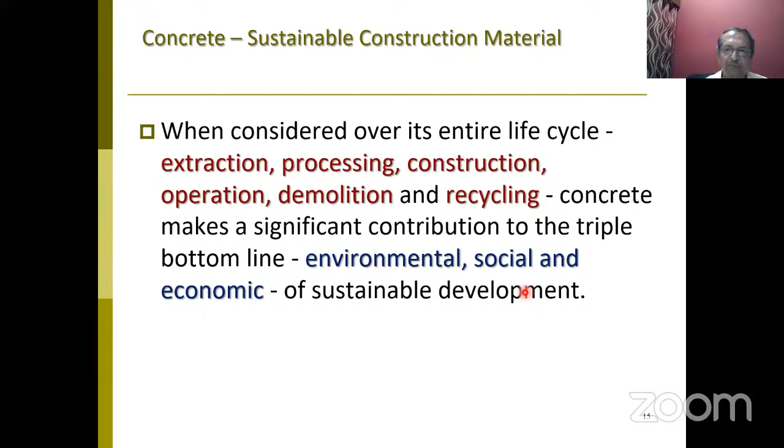So based on that, if you study most of the materials which are available now as alternate to concrete, it appears that we have no choice but to use concrete, and concrete is not such a bad enemy after all, from the bottom line of environmental, social, and economic sustainable development tenets.

Still, we want to make that concrete more sustainable, or as sustainable as possible. And the route that we can take is to make cement more sustainable. That is, use less energy intensive kilns, or use supplementary cementitious materials to reduce the clinker component.

Here I would like to say that this concept of 1 ton of carbon dioxide for 1 ton of cement was in the era of ordinary Portland cement being called as cement. Today, cement has sometimes more than even 50% of alternate materials which is there in the cement, which is called blended cement.

So for example, if you use fly ash, up to 35% of the 1 ton of cement happens to be fly ash, which is not contributing to carbon dioxide emission. Or if you are using slag, GGBS, which will be probably upwards of 50% of the volume of cement. So if you can, this in fact enhances the quality of concrete and contributes to sustainability.

So one is to make cement more sustainable so that we produce more and more blended cement rather than ordinary Portland cement, and keep ordinary Portland cement reserved to only where you require certain high strengths and high performances in structural requirements. Anyway, there are also possibilities that we use new types of clinker.

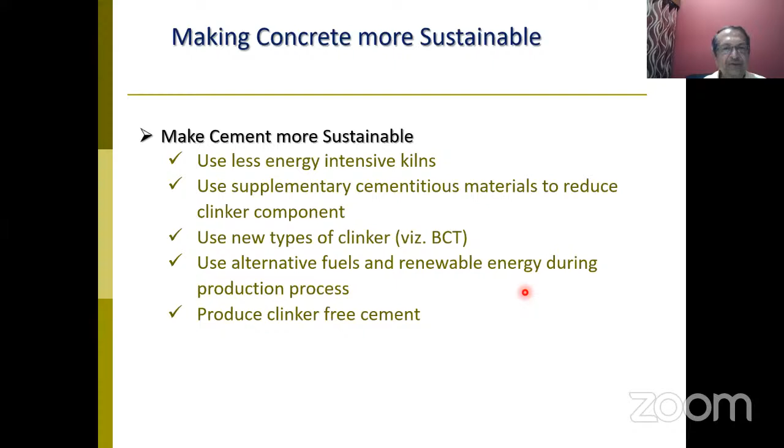So there is also an attempt to see if we can produce clinker-free cement. So clinker is the one which is bringing in the harmful things like emissions and also energy consumption. We are trying to see if you can manage without clinker a cement.

Now coming to concrete, the alternative materials people are looking at in concrete are recycled aggregates, secondary aggregates, and then utilization of wastes in concrete, either as reinforcement or as special additives.

Attempts are also on to make the concrete more durable, because the longer a building or a structure lasts, the lesser will be the consumption of cement or concrete or both, and hence sustainability is said to be achieved through longer lasting structures.

So this is also vigorously being pursued, and then capturing or sequestering carbon dioxide in concrete, or capturing carbon dioxide and storing it underground in bedrocks and so on and so forth. This is another route that people are trying to pursue. And they are also trying to see if we can go for clinker-free concrete like geopolymers, etc.

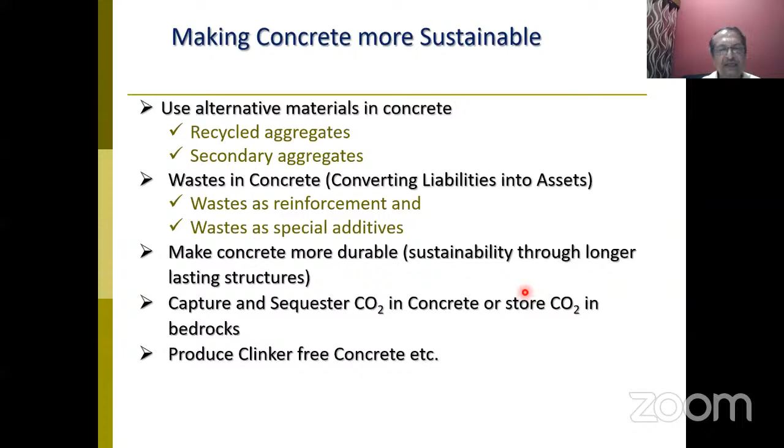So how people are now trying to attempt the reduction of carbon dioxide as mentioned, by 2050 or 2070 or whatever, there are several attempts. A few of them I would like to very quickly go through because the time allocated is only 25 minutes. So I would like to highlight certain things. It's neither exhaustive nor complete in that sense, but whichever is priority according to my limited knowledge, I have tried to cover here.

So now, first thing that I would like to highlight or show is about the Global Cement and Concrete Association's initiative. This is called the GCCA Initiative. This was unveiled on September 1, 2020.

40 of the world's leading cement and concrete companies, including several leading cement companies from India, have signed this pledge, and they have a roadmap that they are now trying to put in place. So the ambition statement of GCCA demonstrates that there is a commitment of the industry across the globe to drive down the carbon dioxide footprint out of this particular material, which is the world's most used man-made product, with an aspiration to deliver the society with carbon neutral concrete by 2050.

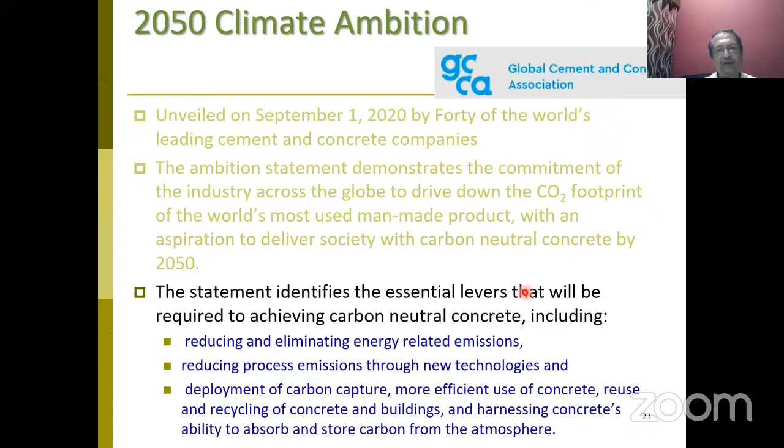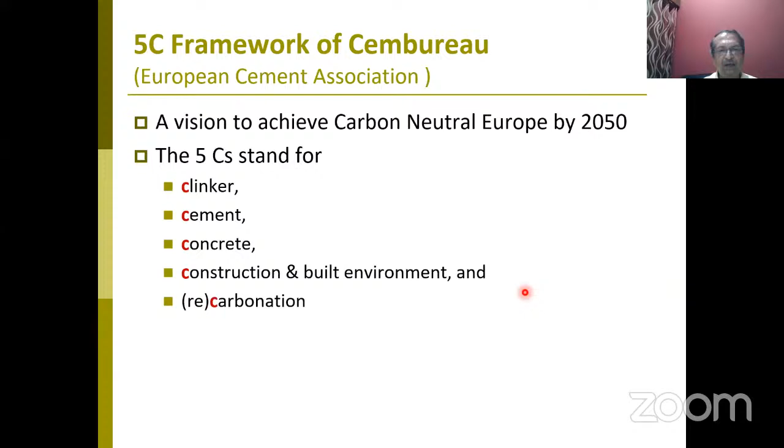So one such initiative which came much before GCCA is called the European Cement Association, or Cembureau's framework. This is called the 5C framework. The 5 C's are C for clinker, C for cement, C for concrete, C for construction, and C for recarbonation. These are the sectors in which people are trying to work, and they are confident.

Of course, this is a very detailed document available on the net if anybody wants to see how they are planning. Cembureau is planning this 5C approach and reducing emissions.

That is, through the cement route, through the concrete route, through the construction carbonation route, through reduction in emission route, and clinker route, and so on.

So carbon capture and utilization is one approach. Carbon capture and storage is another approach. This is what Cembureau has attempted to do, which most of the European countries are following.

Of course, GCCA is a much bigger worldwide body that has now come into the picture from 2020 onwards, and India is also participating through that route.

There are some approaches which I would like to quickly highlight for upcycling the carbon dioxide. Hundreds of companies and research groups are working on this to keep the carbon dioxide out of the atmosphere and store it in some place, including geological formations, soil, soda bubbles, concrete blocks, and so on and so forth.

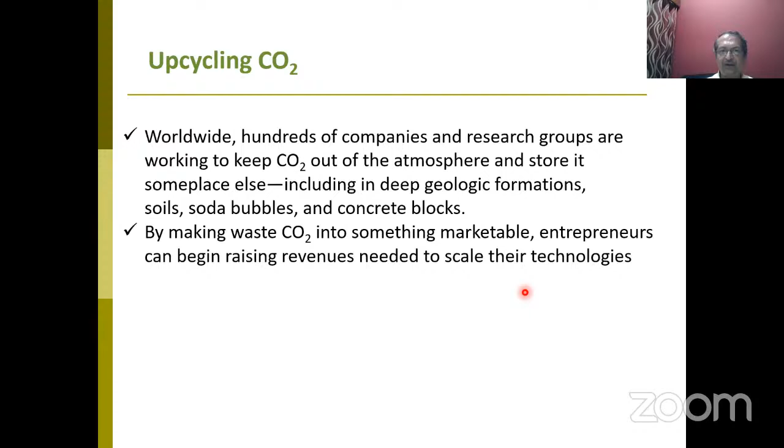They are also trying to make waste carbon dioxide into something which is marketable. So this carbon dioxide, if somebody is going to put into use and it can be marketed, that will be a very nice way to make sure that it doesn't get into the atmosphere. So entrepreneurs can begin raising revenues needed to scale their technologies by making this marketable.

So there is also a possibility that carbon dioxide mineralization is possible by capturing the carbon dioxide from several, not only cement, but other industrial emitters also, purifying them, storing them, and distributing to concrete producers in pressurized tanks.

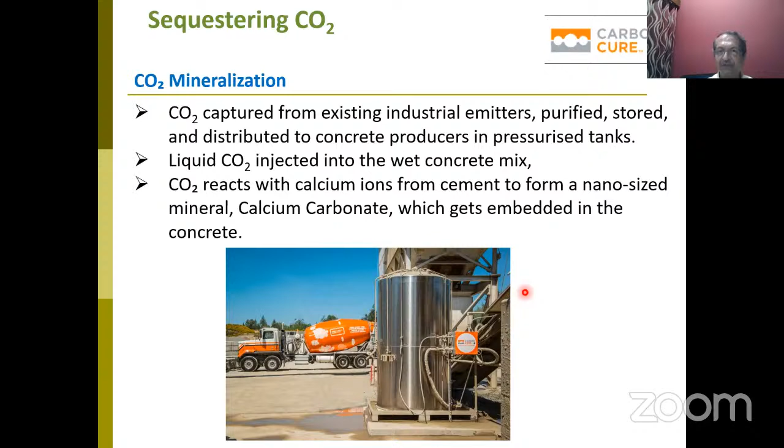This purified liquid carbon dioxide is kept in stainless steel drums at the RMC yards, or ready mix concrete producing manufacturers' place. It is injected into the wet concrete mix using a patented technology, and the carbon dioxide reacts with the calcium ions from cement to form nano-sized mineral calcium carbonate, which gets embedded in the concrete.

So the result is that we get a stronger concrete, we get better mix optimization with a reduction in cement consumption and also consumption of carbon dioxide. To the extent people are expecting that about 500 million tons of carbon dioxide per year can be sequestered or captured and put into good use in concrete.

Just like I mentioned earlier, when we add mineral admixtures to cement, it's not an adulterant as many people think it is. In fact, the introduction of either fly ash or slag improves the performance of the concrete in terms of strength as well as durability, like capillary closure and better performance against acids and so on and so forth, and reduction in the corrosion of steel, etc.

Similarly, by inducting or inducing liquid carbon dioxide into the concrete mix, we not only consume carbon dioxide, but we also improve the quality of concrete.

So this technology can be retrofitted into any existing concrete plants, and many attempts are happening of this approach in India as well. Not only injection of carbon dioxide, there is also a possibility of curing with carbon dioxide. The idea is to get much higher strength and better durability. This is something which has been proved and is now being tried by several RMC plants across the world to improve on this particular system.

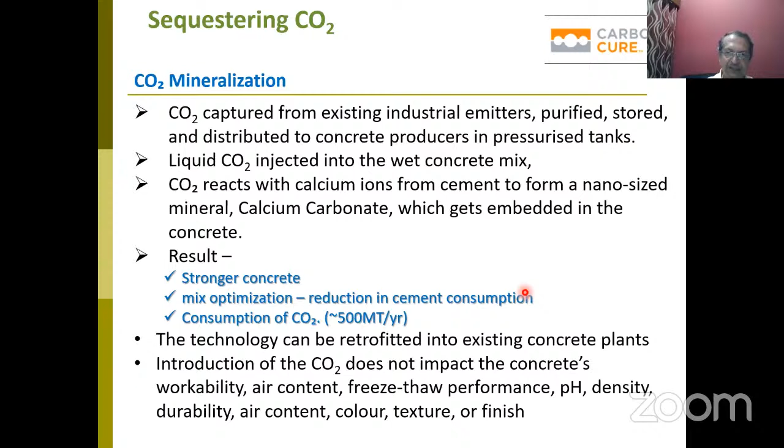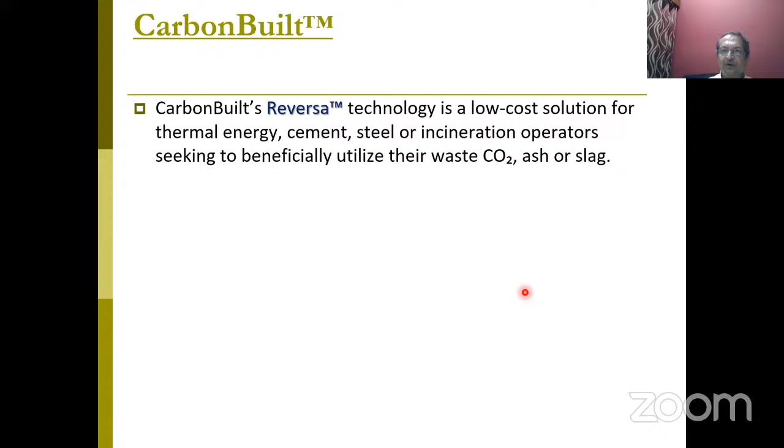There is another approach which the Institute of Carbon Management of UCLA is proposing. This involves locking flue gases of carbon dioxide into limestone within the concrete, a little different approach from the previous one. This is also getting popularized, called the Reversa technology, again patented right now. It's a low-cost solution for thermal energy, cement, and steel or incineration operators.

The Reversa process reduces emissions through a combination of utilization of carbon dioxide by permanently embedding it, and also avoiding, that is reducing, carbon dioxide emissions associated with raw materials. This modular technology can be added to a site to permanently embed the flue gas carbon dioxide into masonry or precast concrete produced nearby. During the curing process, carbon dioxide is directly injected from flue gas streams like power plants or cement factories, without storing it. The concrete manufacturing industry is placed next to these carbon dioxide producing plants, feeding that directly into the concrete mixture where it is chemically transformed and permanently stored.

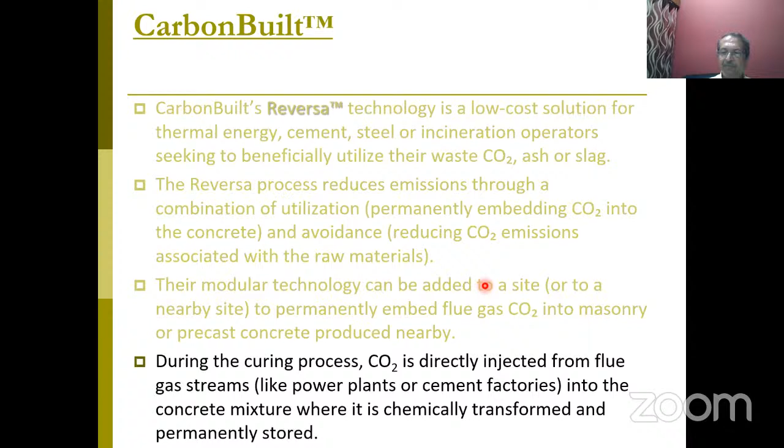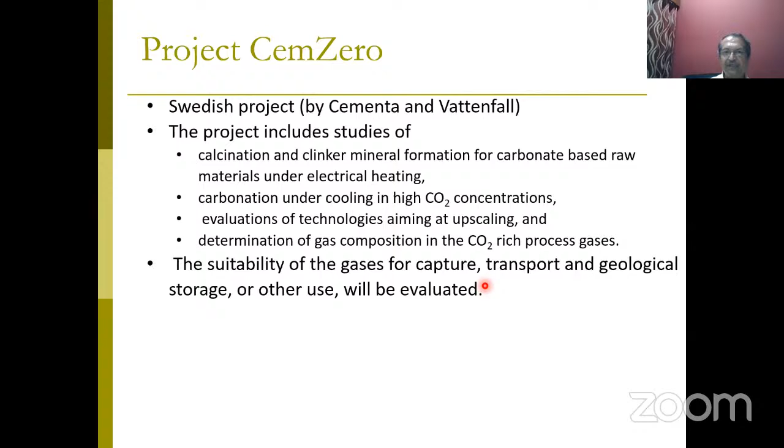There is also another project called Project CemZero, a Swedish project by Cementa and Vattenfall. This project involves studies and prototype experimentation on calcination and clinker mineral formation for carbonate-based raw materials under electrical heating, carbonation under cooling in high carbon dioxide concentrations, and evaluating technologies aiming at upscaling and determination of gas composition. The suitability of gas capture, transport, and geological storage is being evaluated. The three thrust areas that Project CemZero is focusing on are heat transfer with plasma in rotary kilns, direct separation of carbon dioxide from calcination of carbonate-based materials, and carbon dioxide-free products with electrified production.

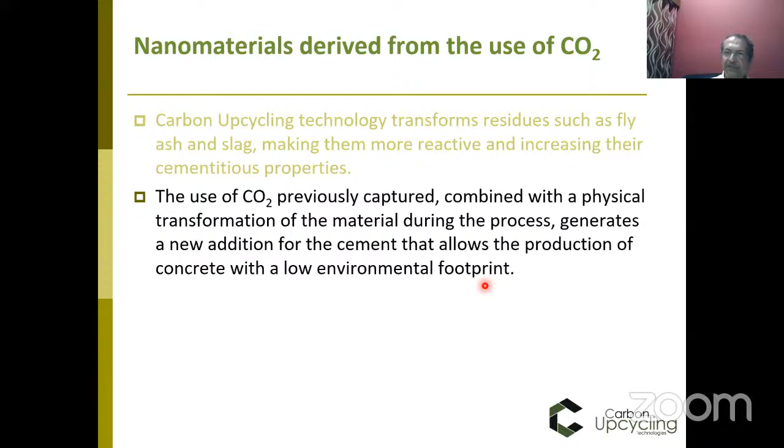And then nanomaterials, everybody is getting into this area. Carbon upcycling technology transforms residues such as fly ash and slag, making them more reactive and increasing their cementitious properties, which means we can incorporate more of these materials into cement, thus reducing the OPC content within the cement itself. The use of carbon dioxide previously captured, combined with physical transformation, can create a new addition to the cement that allows for production of concrete. The improvement is evident for everybody.

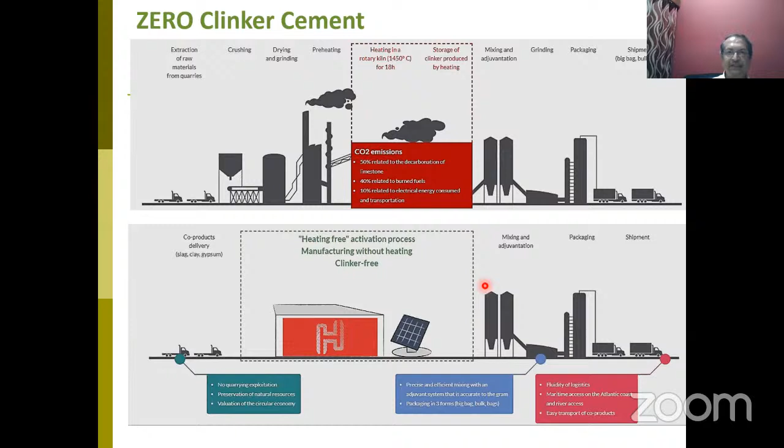There are other approaches which many companies are using. One approach targets the portion which heats the clinker to 1450 degrees centigrade. They are trying to see whether we can do a heating-free activation process using alkalis and things like that, so that we avoid that heating process and also reduce all the attendant carbon dioxide emissions and so on. This manufacturing process by a company called Hoffmann Cements is also trying the approach of valorization and production so that we can use this particular cement for concrete.

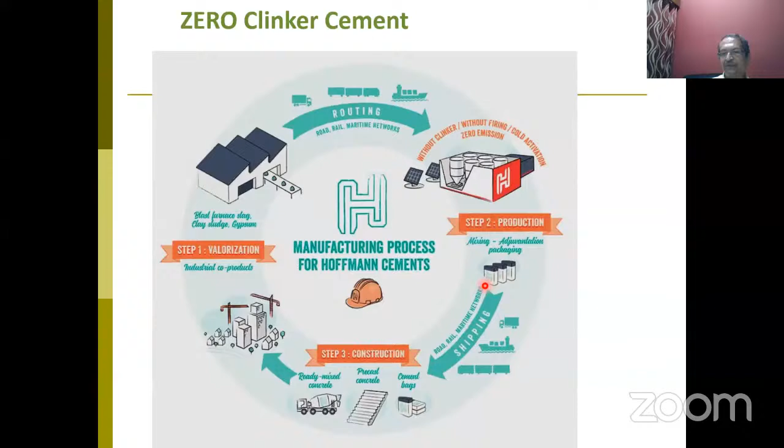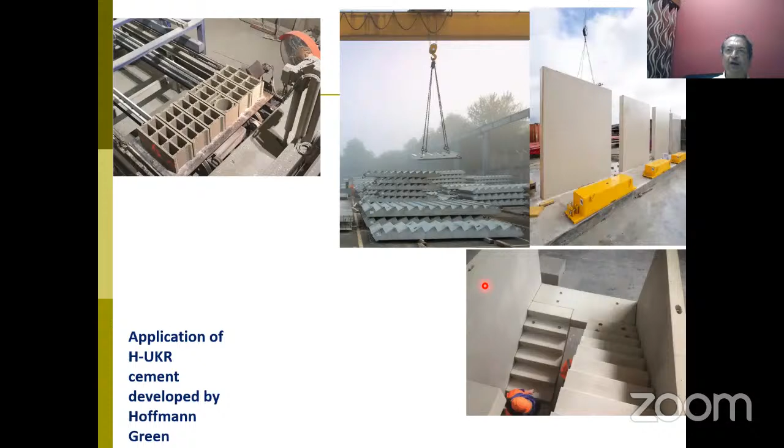There are various types of cement that they have already produced. One is called H-UKR cement. I'm not getting into the details of this for want of time, but they have already started producing prototypes, as you can see: ready-made stairs, ready-made roofing, ready-made blocks, and so on and so forth, even wall panels. They are already into commercial production, and this is also called green cement, green concrete by them.

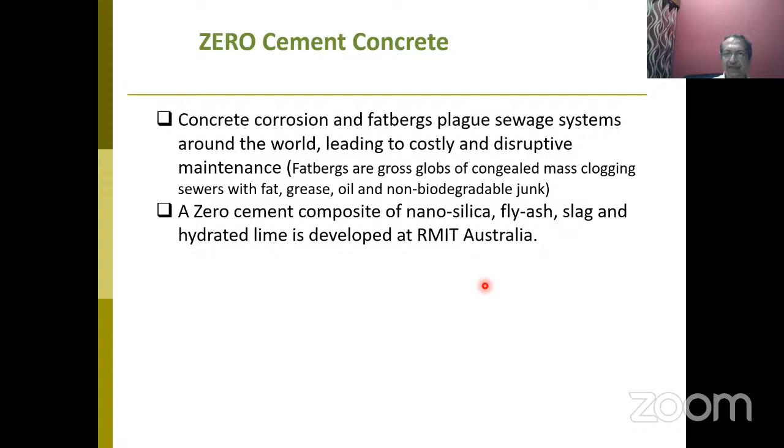There are many approaches using even gypsum and so on, which I'm not getting into. They're also trying to see if they can produce a zero-cement concrete kind of thing. This work is happening in Australia, where they are trying to avoid the concrete corrosion that happens in sewage systems by using nanosilica, fly ash, slag, and hydrated lime. It's a very environment-friendly approach that they are taking.

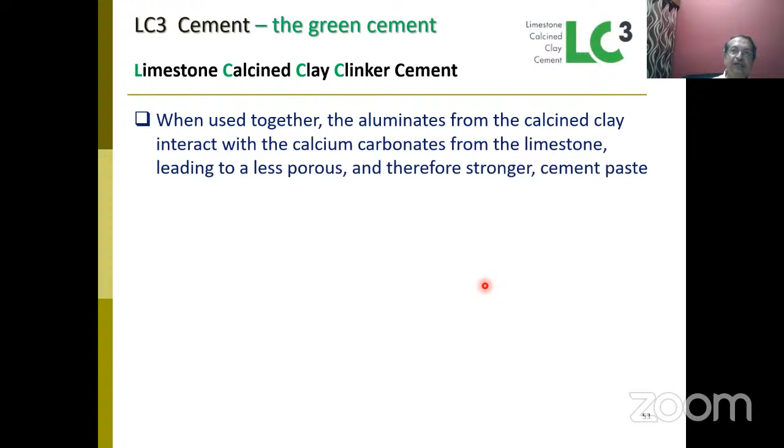Lastly, I would like to talk a few minutes on this LC3, on which the BIS has already formed a working group, and the draft code for LC3 is almost ready. This is basically calcined clay limestone cement, a good combination using calcined clay. The clay used here is not the superior kaolinite kind of clay required for the ceramic industries and so on; a slightly lower grade clay which is now getting wasted can be incorporated here, and this calcined clay can be a very good input into the manufacture of cement.

This is going to pick up in the coming years, even in India. This is led by a Swiss group called the Swiss Agency for Development Cooperation, and 2-3 IITs from IIT Delhi, IIT Chennai have collaborated with them, along with some universities from Cuba, Brazil, etc. The Indian cement companies are very vigorously pursuing this.

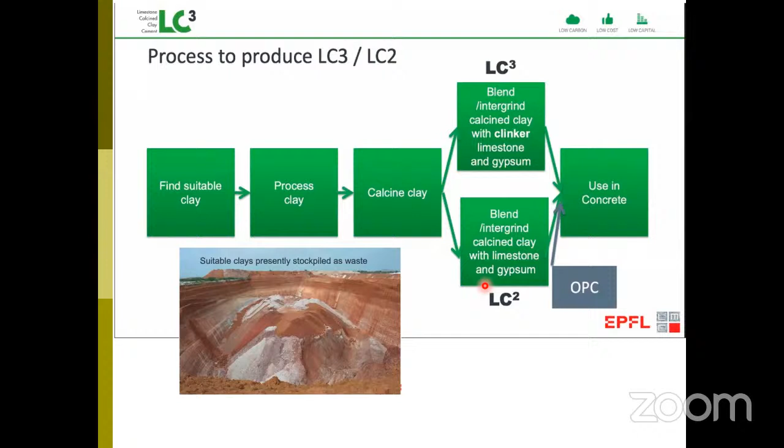The basic flow chart is to find suitable clay, process it, and calcine it. Then there are two routes: one is blended with the clinker, along with limestone, clinker and gypsum, or blended or interground. One is called LC2, where there is no OPC content - it is just a blend of calcined clay and limestone. You can keep it for any number of years without problems of hydration. You can add OPC whenever you want and get your LC3. In LC3, we have clinker ground along with limestone and calcined clay, and you get a cement called LC3 cement.

So both of these are likely to come in a big way in India. I would like to probably end with this right now.

Just one last thing about concrete construction practices, which need to be looked at from the Indian perspective. The majority of concrete produced in India is by an unorganized sector, which is a big difference from Europe or America, where everything is ready-mix concrete done under good supervision with good quality. We have to see how we will introduce these concepts into concrete manufacturing, which is largely unorganized, though a lot of it is now becoming organized sector, and how to handle that is to be looked into.

Virtually no awareness exists about sustainability aspects, either in the client's mind, the concrete producer's mind, or the contractor's mind. We need to drive these issues into their minds and make them responsible. Environmental regulations are also inadequate and not enforced effectively.

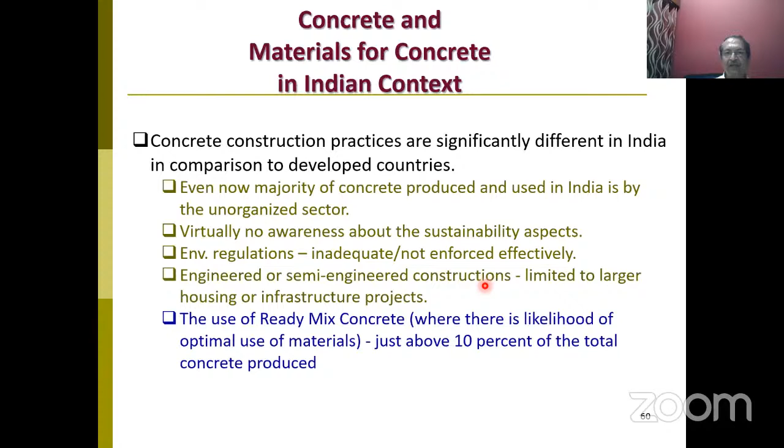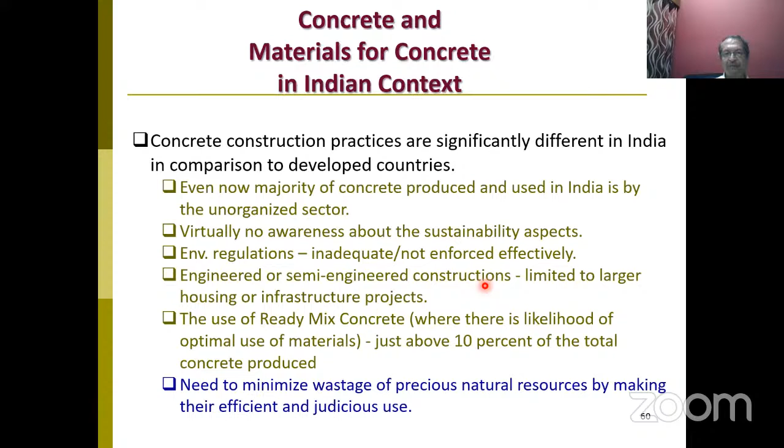Engineered or semi-engineered constructions are limited to large housing or infrastructure projects, and use of ready-mix concrete is just above 10% of the total concrete produced. So all of us have a responsibility to ensure more scientifically produced ready-mix concrete is used, and we need to minimize wastage of these precious natural resources through efficient, judicious use.

The construction industry has a large role to play, and several groups in different countries have tried different approaches with varying degrees of success. Durability is one of the important factors being looked into, other than QA/QC procedures. Thank you very much for the opportunity given.

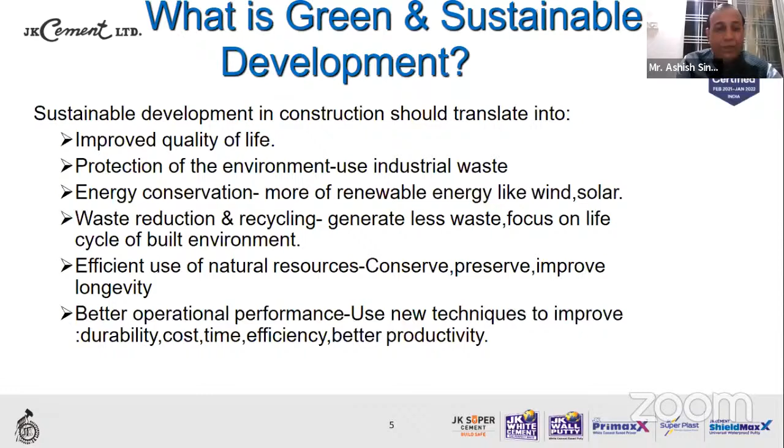So if we can develop construction in such a way towards sustainability, it will improve life and protect the environment. We have energy conservation, waste reduction, efficient use of natural resources - that means conserve, preserve, and improve longevity, better operational performance, etc. All these factors shall be covered in the later slides in one way or the other.

Then after energy, water and other natural resources during the entire process of construction, operation, and afterwards demolition. So all these three factors - we have to optimize the use of electricity and water so that buildings are designed as per energy efficiency.

Third point is renewable energy. Why go for fuel-based energy or electricity? Why not shift towards solar, hydel, or wind power? These are the three different options in front of us. So we can very well switch, or at least partially convert, our energy consumption towards solar, hydel, and wind power.

Fortunately, India is one such country blessed with a lot of solar radiation, so solar energy is definitely picking up in a big way. Our respected Prime Minister has a big mission on solar power energy. A lot of big projects are already in operation, and many more are under implementation. So we could well be one of the largest solar power producing countries going forward.

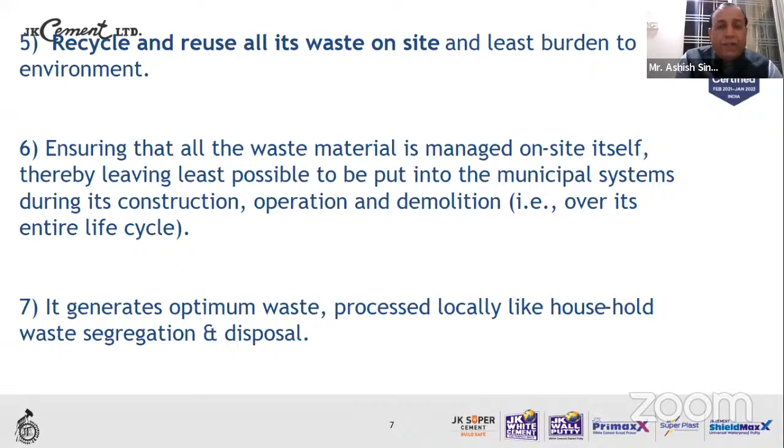What are the other factors? Recycling and reusing waste, ensuring all waste material is managed on the site itself, and generating optimum waste so it can be processed locally. Sometimes material is called upon exorbitantly, and once not used, it is just thrown away, creating a lot of menace and issues for the municipal system, and at the same time it's a national loss as well. So we need to be very practical in optimizing these resources.

As we all know, carbon emission comes from different sectors. In the very first instance, I told you that more than one-third of carbon dioxide emission is contributed by construction activities, which is absolutely alarming. Apart from the construction industry, manufacturing industry contributes almost 30%. Transport is again a big contributor, close to 30%, and the rest of the industries put together are 10%.

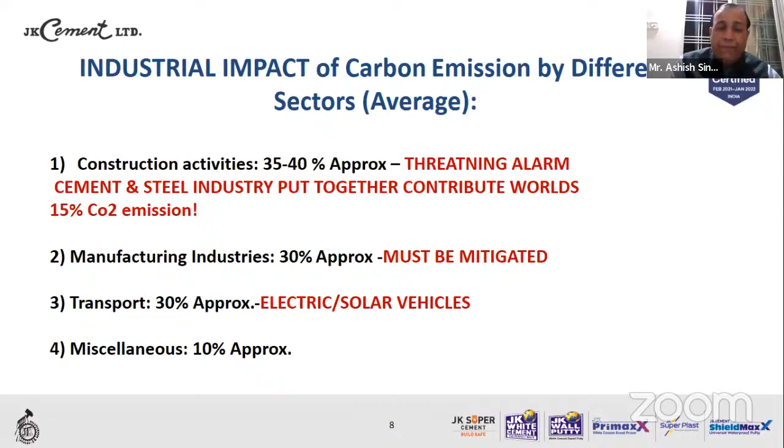As Dr. Kalkar sir has elaborated wonderfully, a lot of research work is being conducted across the globe on some very latest technologies where capturing of carbon dioxide is done, sequestration of the carbon dioxide is done, and it can be put back into the system. Not only can the carbon dioxide emission be absorbed and captured, but the same carbon dioxide can add to the reduction of cement consumption itself. So it works in two different ways, and ultimately the vision, mission, and ambition of the globe is that by 2050 we can have net zero carbon dioxide emission. Every single person is a stakeholder in achieving that mission.

Moving on to energy contribution. The energy of construction can be calculated and optimized through planning, designing, construction, and substitutions. These are well known facts. I will just quickly go through the headlines of all these points.

Reuse buildings instead of constructing new ones. If there is a possibility that an existing setup, however old it may be, can be renovated, and if it is structurally strong and habitable, let us renovate it and start using it instead of going for an altogether new building. Specify low carbon concrete mixes.

This is going to be a game changer. When we talk of low carbon concrete mixes, civil engineers and concrete technologists can very well understand that we can go for optimized fly ash, slag, or a combination of slag and fly ash. These are secondary cementitious materials embedded into the concrete, whereby we can produce not only a low carbon dioxide concrete mix, but one that is also economical and sustainable.

The third point, in continuation of that, is limiting carbon intensive materials. As we all know, a lot of aluminum, plastics, foam insulation, paints, etc. are also used during the construction of a building or any project. So how can we minimize the use of aluminum, plastics, foam insulation, paints, etc., which are high carbon footprint materials? Architecturally, we have to think in these directions.

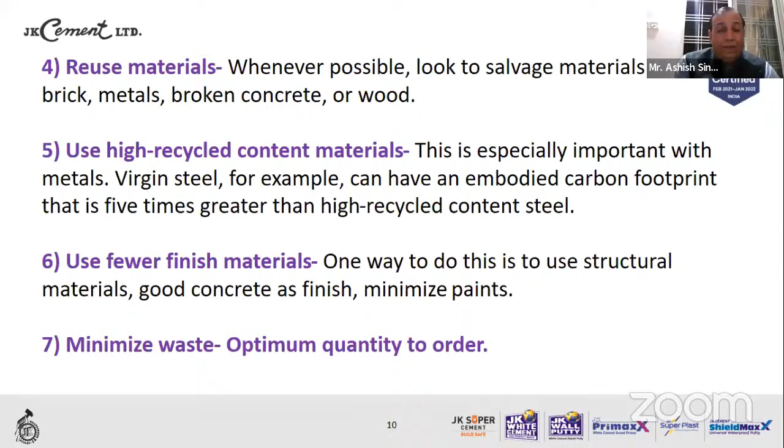So that means we can have different kinds of mix and matches during our construction strategies, minimizing the waste. Always order the quantity to the extent of consumption.

Now, embodied energy is a very good concept of establishing how much EBE has gone into producing one particular product.

Let us take the example of cement. Cement is a mined material. Its primary raw material is limestone, which is mined from the mines. So right from the mining and extraction of the limestone to the finishing, which is done after the process, to the finished material, then transported to the final end customer through a delivery system.

So some quantum of energy will go into mining of the limestone, some quantum of energy would go into manufacturing, conversion of limestone to cement, and some energy will definitely go towards fuel and transportation, that is transportation energy, and finally to the product delivery. So putting together all these four parameters would add to the final EBE of cement.

Likewise, for every single material, EBE is calculated and designed. So to prevent carbon dioxide emission in our construction strategies and planning, we need to go for low EBE materials. As simple as that. Now, how to do that?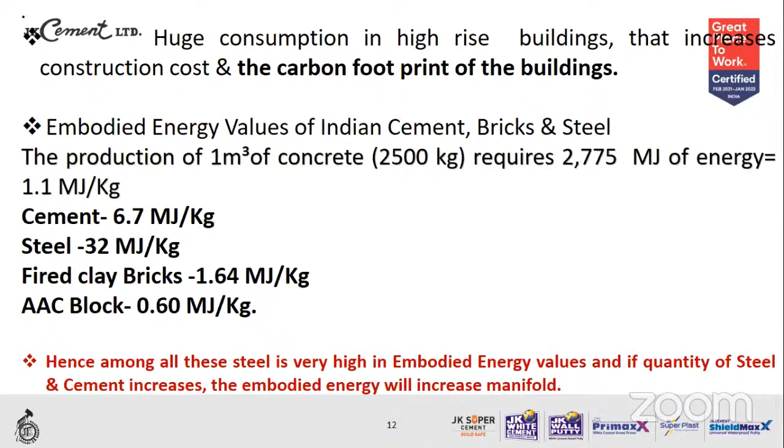So it's a very conscious decision that we can take, replace fired clay bricks with AAC block. Similarly, instead of going for OPC, let us switch to either PPC or slag cement or triple blend cement during the concrete, so that we can minimize the carbon footprint on account of EBE calculations. Among all these, steel is very high in embodied energy values, and if quantity of steel and cement increases, the EBE content goes manifold.

Just a chart which shows EBEs of different products. As I mentioned, fired clay bricks is 1.64, whereas AAC block is almost one third. Just look at that alarming and screaming red values. Aluminum is as high as 170. Acrylic paints, which we always passionately choose for our new houses, is almost 62. Plastic 90. Just look at steel.

Anyway, it cannot be avoided, 32. Cement cannot be avoided, but if we go for blended cement, it could be significantly low, as low as 3.5 to 4. So there has to be a very conscious call on EBE, and I would urge all the structure consultants to have a very fair understanding on EBEs of the building materials being used.

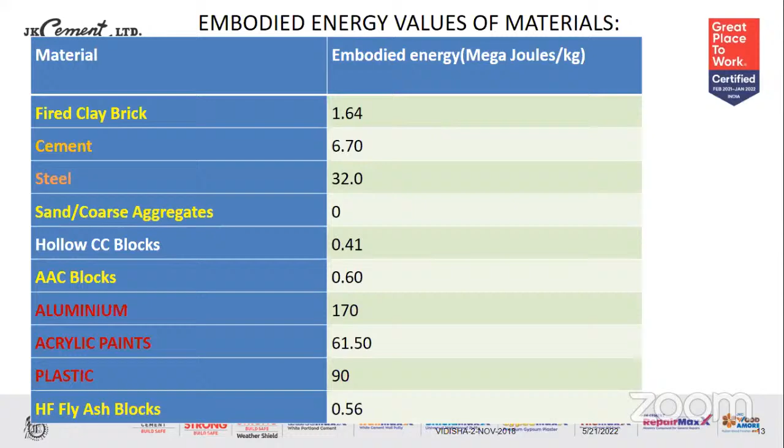Aluminum can be minimized, acrylic paints can be avoided, plastic can very well be gotten rid of as far as any new construction is concerned. So we can always shift from high EBE products to low EBE products, because it has a direct connection with reduction in carbon dioxide footprint.

As we have been mentioning again and again, by 2050, the global mission is to decarbonize the world's built environment. Decarbonizing means making net zero the world's built environment, and to meet global climate change goals. A lot of global efforts, research, and publications are being done. Technologists and scientists are banging their heads together, and I'm not surprised if the 2050 mission could be achieved earlier than that. So we are all keeping our fingers crossed, looking forward to decarbonizing the world's built environment much before 2050.

Green concrete is again a reply to all these things. It uses waste material as at least one of its components, or its production processes do not lead to environmental destruction. So if we can use the waste material and just embed it in our concrete system, it can be made green.

The next point is carbon sequestration technology, which has been elaborately and wonderfully explained by Dr. Kalgal sir, and we can always look forward to that: mineralizing the atmospheric carbon dioxide and injecting it into the concrete mix, thereby reducing the amount of cement required in building projects. So we get twofold benefits: not only is atmospheric carbon dioxide captured and mineralized and injected into the concrete mix, reducing carbon dioxide, but at the same time, the cement requirement is also reduced to a larger extent. So this is carbon sequestration for you.

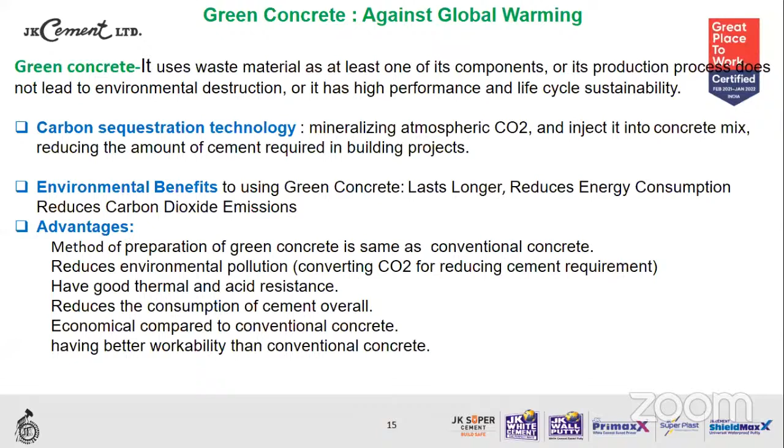Method of preparation of green concrete is the same. We need not have any R&D for that. Just by a common kind of mix, the green concrete can be mixed. It reduces environmental pollution, has good thermal and acid resistance, reduces the consumption of cement, is economical, and has better workability.

So some green, smart, innovative cement and concrete - I will just mention the names. I cannot go elaborately into this because one more very expert panelist is about to enlighten all of us, so I will just throw a small light on that.

Gandhi sir, am I audible and visible? Vinay ji? Yes, sir. Yes, sir. Okay. And sir, could you just let me know how much time I can still go for, because it is 7:15. If time is not a constraint, please let me know. If this is a constraint, please also let me know. Five more minutes. Fine, sir. That's fantastic, five or ten minutes. You can also take ten minutes. Fine, sir, I'll just try to wrap up before that. Okay.

Blended cement, nothing new - it reduces embodied energy due to fly ash and GGBS. Translucent concrete would help us in minimizing the artificial light required, so let natural light come into our buildings. I will just give a few slides that will elaborate that: pollution eating concrete, aerated autoclave concrete, that is AAC block, which is India's first green building material, listed and rewarded by the Indian Green Building Council. And I had the proud privilege of getting this reward for my earlier organization.

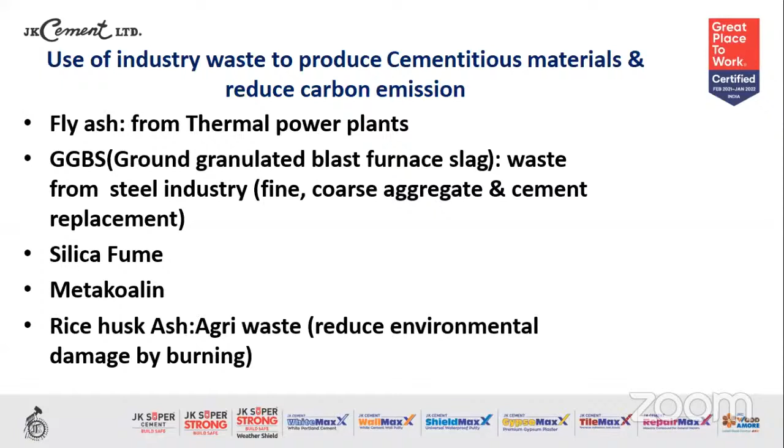As we all know, 1 ton production of OPC releases almost equal to 0.9 tons of carbon dioxide. So let us reduce OPC and move significantly towards blended cement.

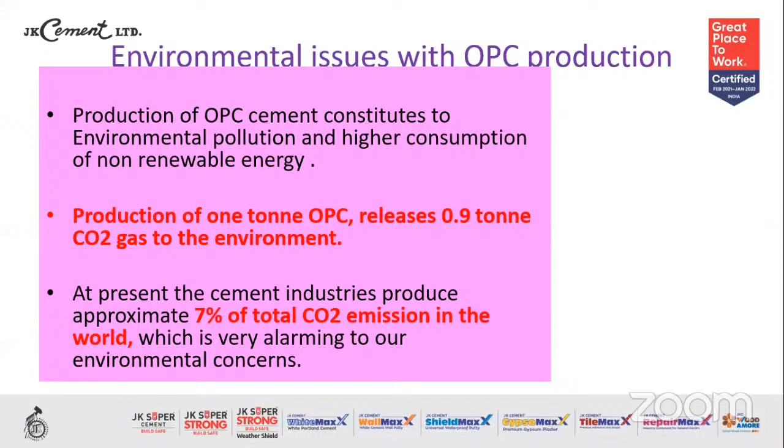There are technical benefits which you can envision. In all possible ways, blended cements are far better in terms of increased strength, reduction of heat, reducing the pore volume in concrete, increasing the water tightness, and resistance to aggressive sulfates and chlorides, etc. So overall, a durable product we can get.

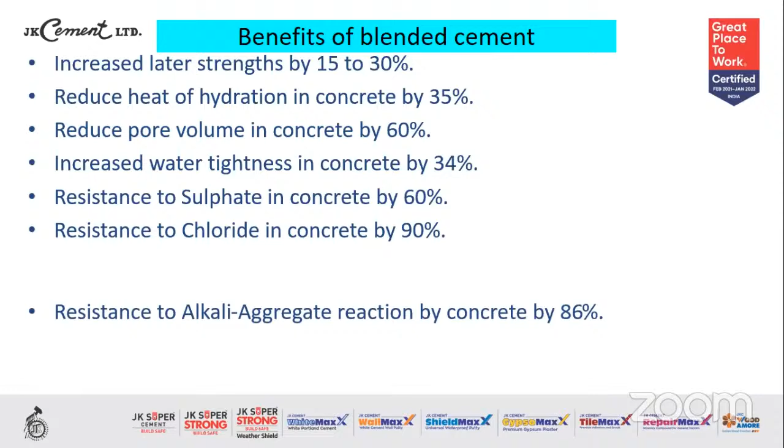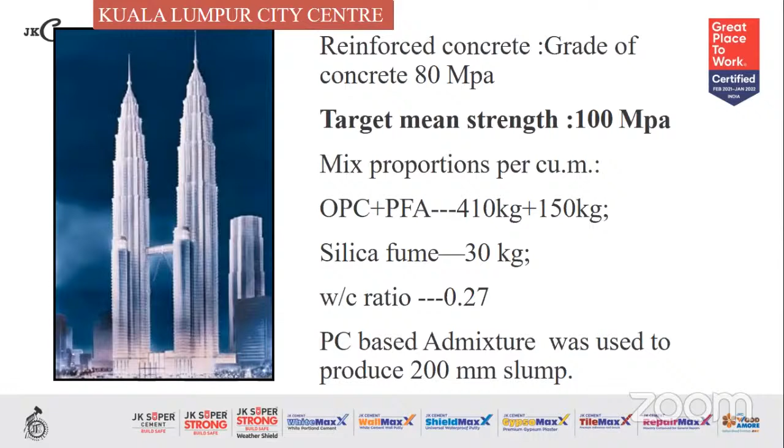No doubt, blended cement can be used to construct buildings and structures of international repute, like Burj Khalifa, or for that matter, the Twin Towers in Kuala Lumpur. Entirely the concrete used was blended cement. So no one should have any doubt, any iota of doubt on that. Blended cement is going to contribute significant reduction in carbon dioxide emission.

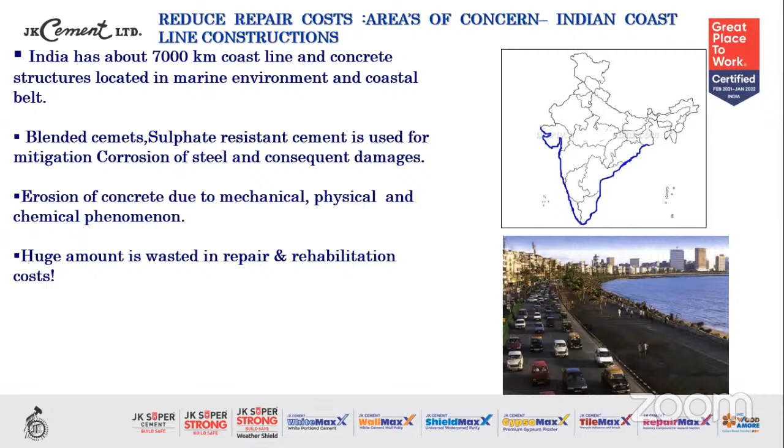For coastal regions also, where the susceptibility of concrete towards chlorides and sulfates is very, very high, Portland slag cement or Portland Pozzolana cement is going to be the proper reply to combat the longevity and durability of such types of concrete. Such hazards and structural damages can very well be avoided if we use blended cement in coastal regions.

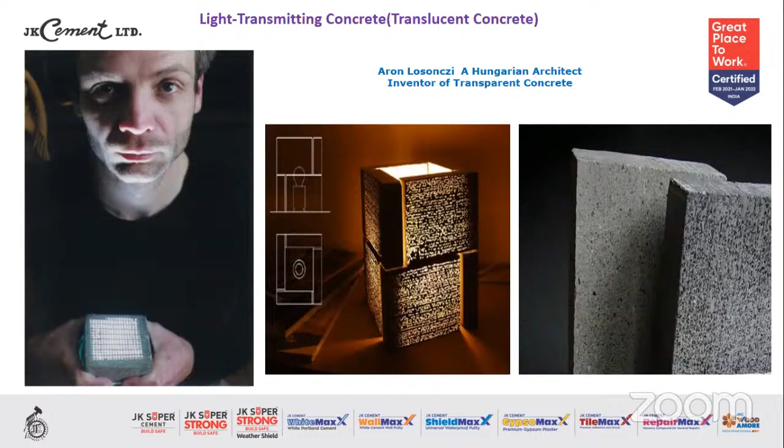Translucent concrete, as you can say, these are basically non-structural concrete. They can be used in facades or on the exteriors, etc. It has the typical capacity to let natural light inside your built environment. During the daytime, when sun radiation is plenty, you can reduce your dependency on artificial lighting to the extent of 40 to 50%. You can minimize your electricity bills. So it's a beautiful aesthetic material.

It's being used extensively in Europe and America. Perhaps due to the exorbitant cost in India, it is yet to get a place, but maybe soon we will have this product also.

Pervious concrete is the sustainable concrete. It allows the water to percolate down and recharge the depleting water tables. We are facing a huge crisis. There are so many places in India, we are at the top of the summer right now, and many Indian villages and cities have started facing a crisis of underground water.

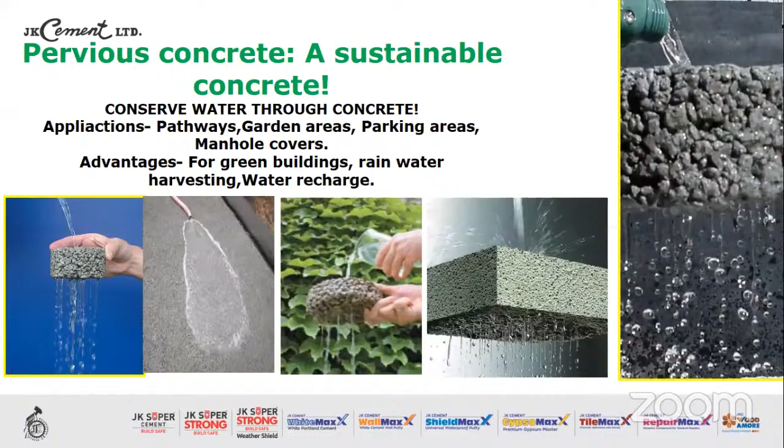We have almost exhausted the water. Water tables have gone so deep, we are unable to get the water. So water recharge is the only reply to that. Pervious concrete gives us an excellent answer to that. Applications can be pathways, garden areas, parking areas, and manhole covers. So let the rainwater go inside and recharge your water table, so that the water goes up and it can be helpful to humanity.

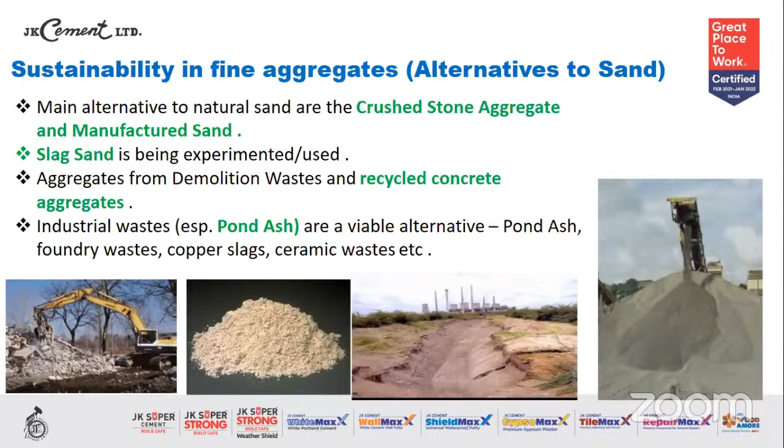Sand cannot be extracted till eternity. Rivers are dying, so there has to be some good alternative to sand. I would just quickly rush through these names: M sand can be a replacement. Slag sand, in the south it is being used extensively. Few manufacturers have started manufacturing, and we look forward to such slag sand all across India. Recycled concrete aggregate, yes, it is going to be the next answer. Pond ash can also be used. So by optimizing these different variations and alternatives available to us, we can minimize the dependency on river sand and let the rivers live their life. They should not die prematurely. So we have got alternatives to sand.

Even a few public works departments are advocating and specifying the use of M sand, because the government has realized that it is no longer feasible to continuously and extensively exploit river sand. Let us partially switch towards M sand as well.

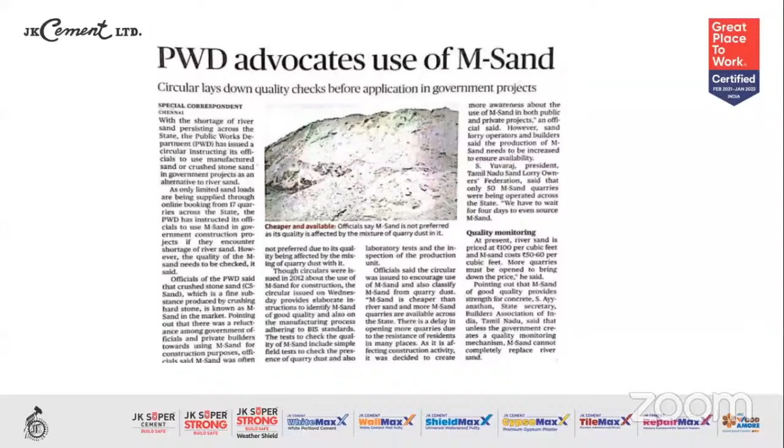GBS, or slag sand, can be a big boost to our sand industry, or I can say the fine aggregate industry. It can be used 100% individually, or also in combination with river sand, M sand, or crusher dust. So these are the means and ways.

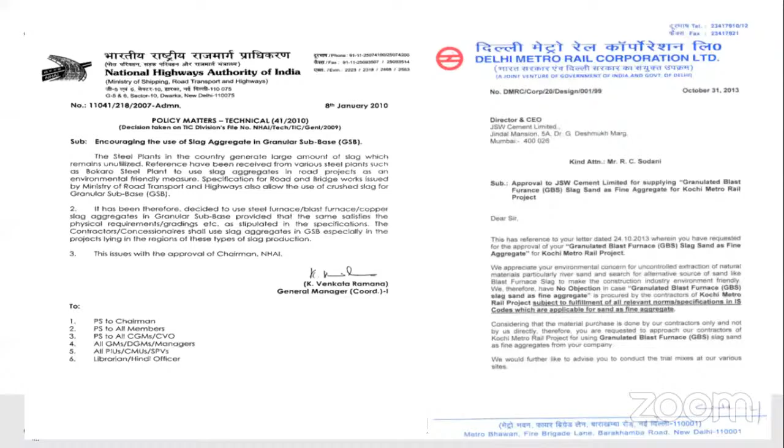There are alternatives, and the best part is that the likes of NCCBM, NHAI, and Delhi Metro Rail Corporation have all approved slag sand that can be used in part or exclusively in their projects. So that is a booster for the industry.

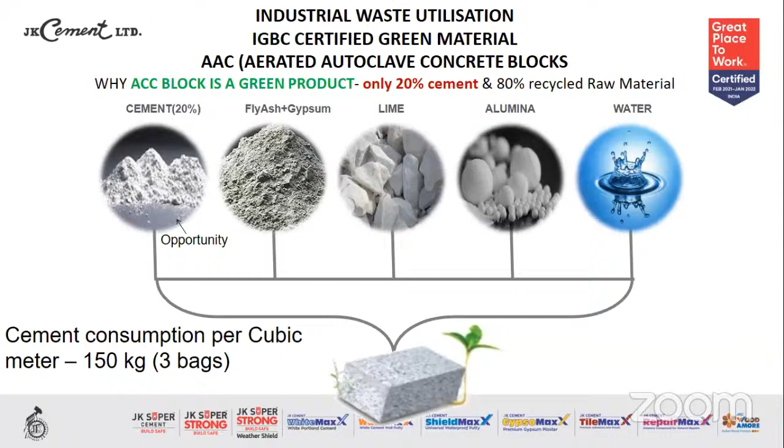As I mentioned, AAC block is 100% green material. We look forward to more green building materials going forward. If the AAC block is only 20% cement, cement is the only thing which generates CO2. The rest 80% is recycled material like fly ash, or other material like lime and alumina. Alumina is a very, very small fraction of a percentage, and then water. So the combination of all such aggregates makes the AAC block, and only 20% cement goes into it. So the rest of the material is again contributing towards it being a truly genuine green building material.

Good for all kinds of applications, being used extensively. Nothing new now for this particular product, it has got wonderful acceptance all across. And the best part is that most state governments and central government departments have started advocating and specifying the use of AAC block.

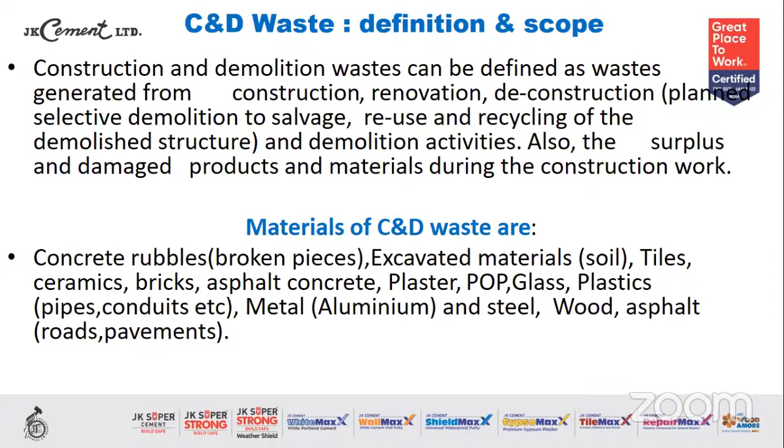Construction and demolition waste is going to be a game changer for India, because India roughly produces over 550 million tons of this solid waste in the form of C&D waste. A huge quantum of recycled sand and aggregate can be extracted out of concrete waste and building material waste, and that can be converted, processed, refined, and put into use for a partial replacement up to 20% in concrete.

PWD, NHAI, and BIS have already permitted, up to M25 grade of concrete, 20% replacement using C&D waste generated coarse and fine aggregates. So that again is going to reduce the quantum of extraction from natural rivers, or maybe from quarries. At least some flip has already been created, some kind of cushion has already been generated, so we will have at least 20% less exploration of these natural materials.

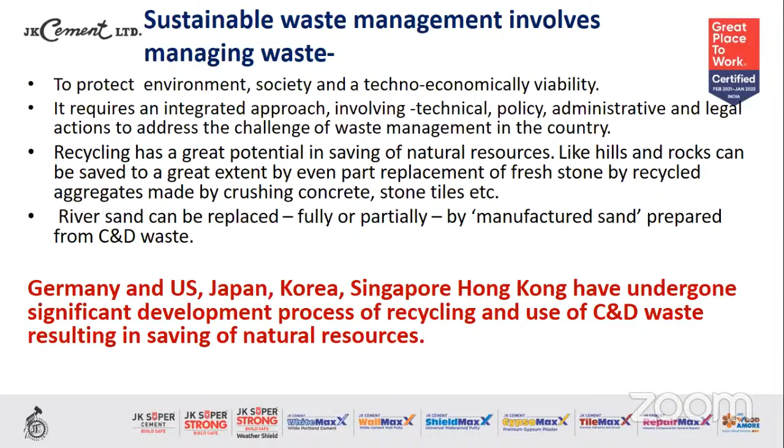Saying so, some countries like the US, Germany, Japan, Korea, Singapore, and Hong Kong have gone up to 90% C&D waste utilization. We are far behind all these developed countries. But the positive thing is that the governments have taken a conscious call, all the way from the central government to state governments, and even municipal corporations have started emphasizing setting up C&D waste recycle plants, and promoting and encouraging contractors and builders to go to the maximum possible extent as per BIS norms as far as C&D waste is concerned.

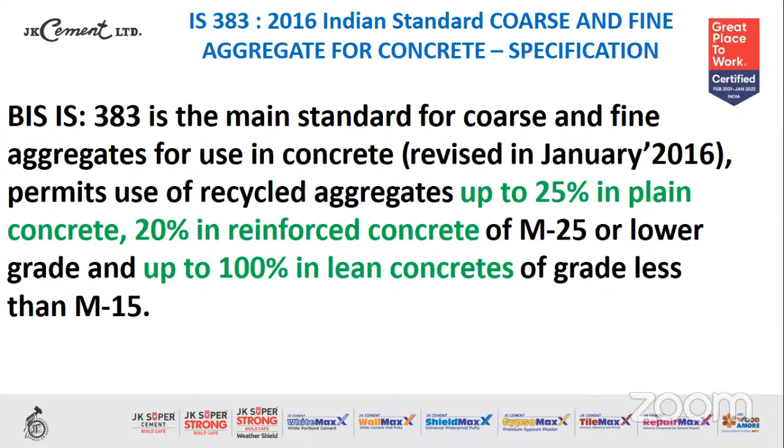So I will not go much into detail. These are the things that we generally see, you go across to any city or town, such waste material is observed lying shabbily on both sides of the roads, and nobody knows how to make use of it. But now, with the latest technology and guidance from developed countries, we have good scope. Up to 25% can be used in plain concrete, 20% in RCC, maximum up to M25. And as far as lower grades, M15 and below, 100% of these materials can be used. This chart gives us the percentages.

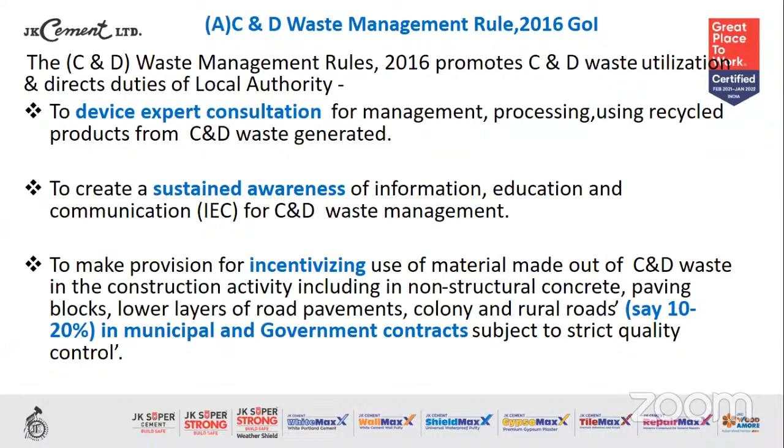CPWD is now encouraging setting up plants so that within 100 kilometers from the plant area, at the construction site, the builder or contractor will be compelled to use some quantity of this waste. The model is already being worked on. In the Municipal Corporation of Delhi, with public-private partnership, wonderful facilities have been developed, and a good quantum of this material is being used.

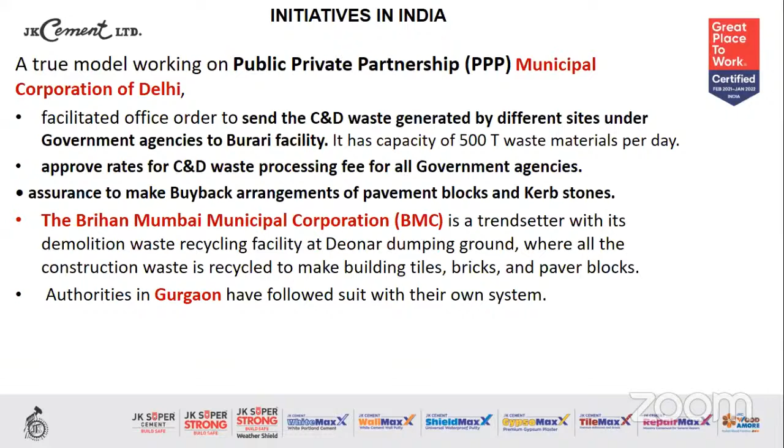In Indore, we have one wonderful facility. I have visited there and found that it is functioning very well. I interacted with the process engineers over there. Going forward, the Municipal Corporation or the Indore Development Authority is going to put up a few more plants, because Indore is a growing city. A lot of waste is being generated, and it has to be put into proper recognizable use.

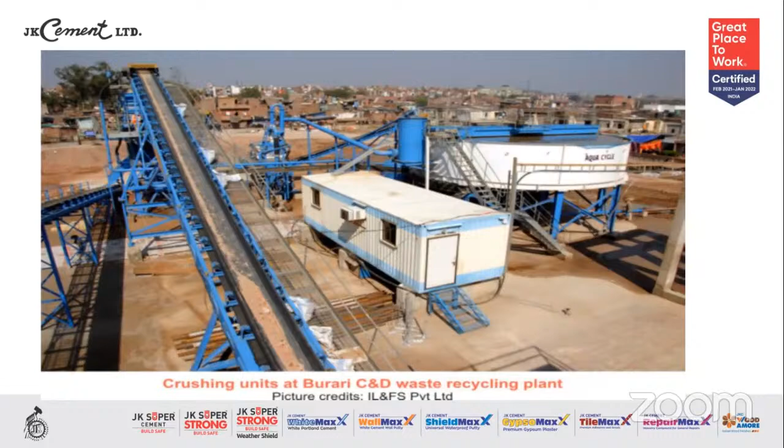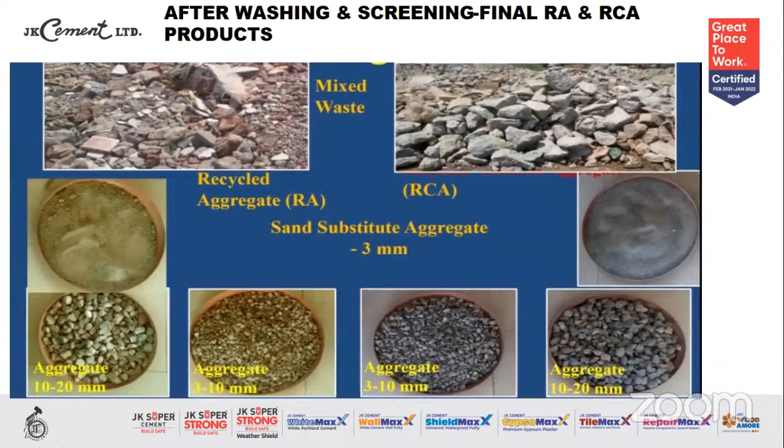After the processing and washing of the aggregates, you get good quality aggregates, almost as good as natural fresh material. These coarse and fine aggregates can be used for manufacturing paver blocks, or tiles, etc., which again saves a good quantum of natural materials.

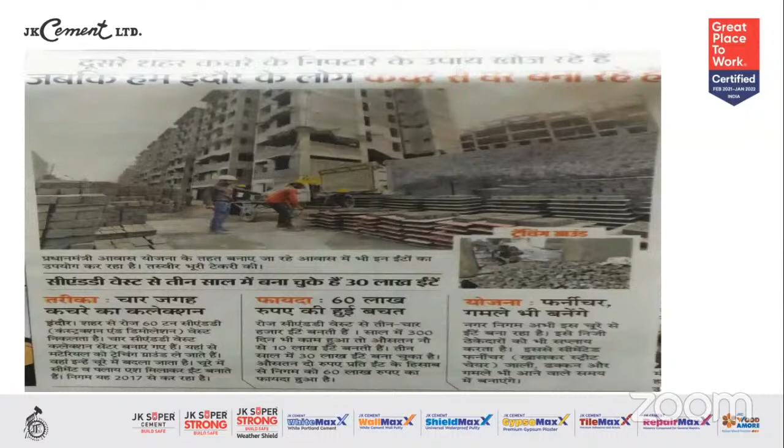Concrete waste generation of 30%. This is one of the news items that I captured, for Indore, in one of the Pradhan Mantri Awas Yojana projects in Indore. The quantum of blocks and tiles being manufactured using materials from C&D waste means that particular plant has earned almost 60 lakh rupees of revenue for this company. So it has economic sense also, and at the same time we are contributing significantly towards sustainability.

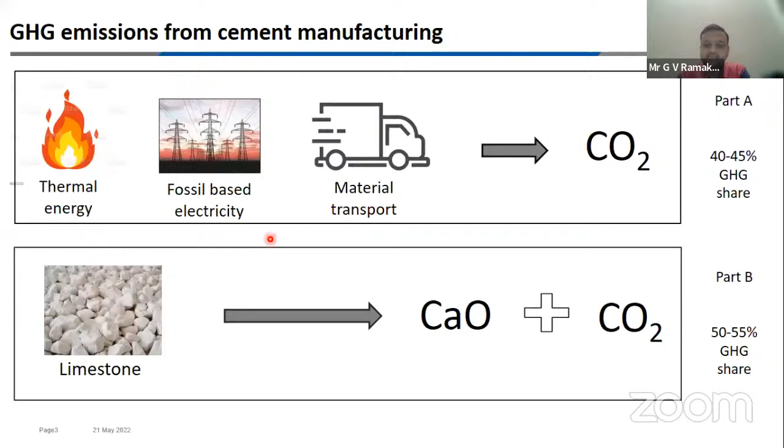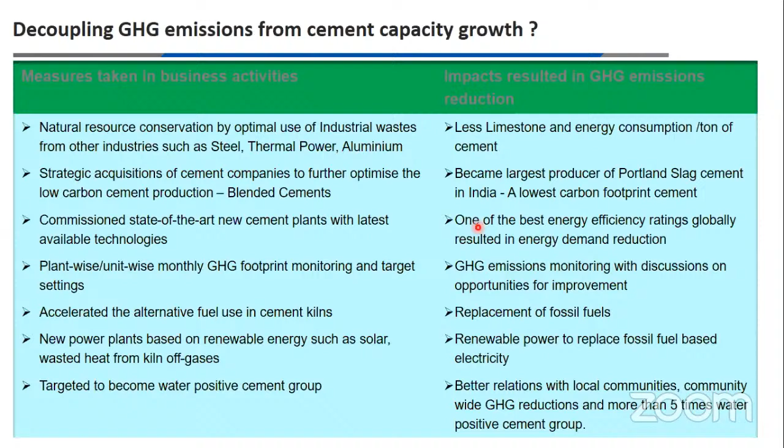One of the best energy efficiency ratings globally, replacement of fossil fuels by usage of alternative fuels or green fuels, renewable power to replace fossil fuel based electricity. So these are our main roadmaps for conserving energy and also to sustain and capture carbon dioxide.

So to become carbon negative, what steps are we taking? Energy efficiency, state-of-art systems have been installed, regular focus on energy efficiency, fan efficiencies to bring down our power consumption. So these are the main aims or main criteria for this.

Then resource efficiency through the circular economy concept, usage of alternative fuels. So we don't use material which can be recycled; this we avoid using. Whatever is generated after the recycling step, which has no further use to the manpower, that fuel only we use in our cement kilns.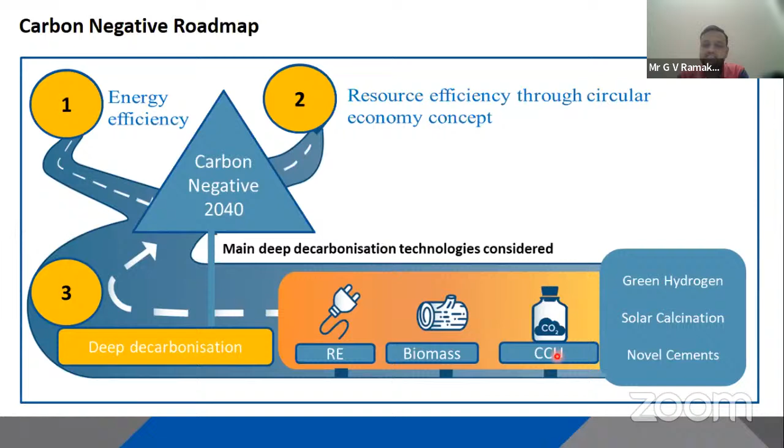And deep decarbonization is the renewable energy, usage of biomass, or carbon capture utilization. Green hydrogen, solar, calcination, novel cements - these are in the pipeline.

So our roadmap is to switch to 100% blended cement production, use of 100% renewable power under fossil-free electricity initiatives, double energy production, use of alternative renewable biomass, bamboo, hazardous waste, hydrogen, municipal solid waste, and use of electric vehicles.

So if we see, for thermal energy efficiency reduction, we use municipal solid waste or green fuels, which will replace fossil fuels. For reduction in energy consumption, like for the power plants, we use renewable power energy.

And to avoid CO2 generation due to transportation, we use electrical vehicles wherever possible, and also the usage of biodiesel in heavy equipment to cut down CO2 emissions. Carbon capture and utilization, CCU, to make value-added products, and carbon sequestration with adoption of other advanced green technology.

So one initiative we've taken is clinker factor reduction, by getting blended cement, using low clinker and making more cement. This is one of the key criteria. It focuses on Portland Pozzolana cement market, composite cements like slag cement, and other different types of cements we manufacture, along with developing special cements which reduce the usage of clinker in manufacturing of cement.

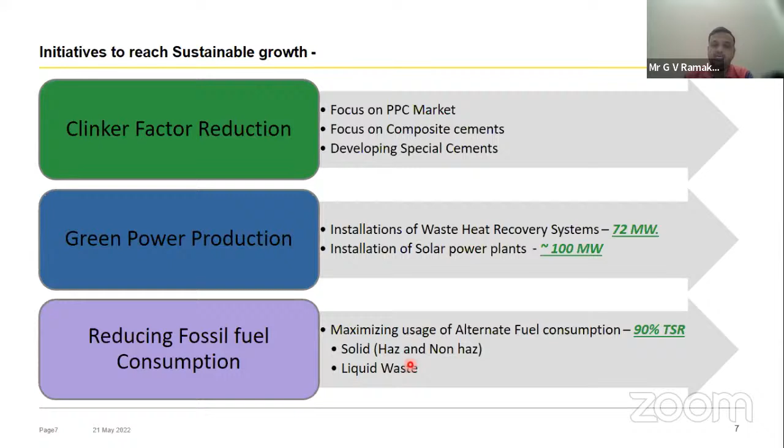If we see the clinker factor reduction, our product portfolios are OPC, ordinary Portland cement, PSC, Portland slag cement, Portland composite cement, and Pozzolana Portland cement. In ordinary Portland cement there's only clinker and gypsum. As I said earlier, we want to transform or focus on blended cement - clinker plus gypsum - and here we can use 60% slag, ultimately replacing clinker with slag, which reduces the footprint.

Similarly for Pozzolana Portland, we can use 35% fly ash, and for composite cement we can use a mix of fly ash plus slag. This way our clinker production or clinker consumption would be minimized, which will ultimately reduce our CO2 generation.

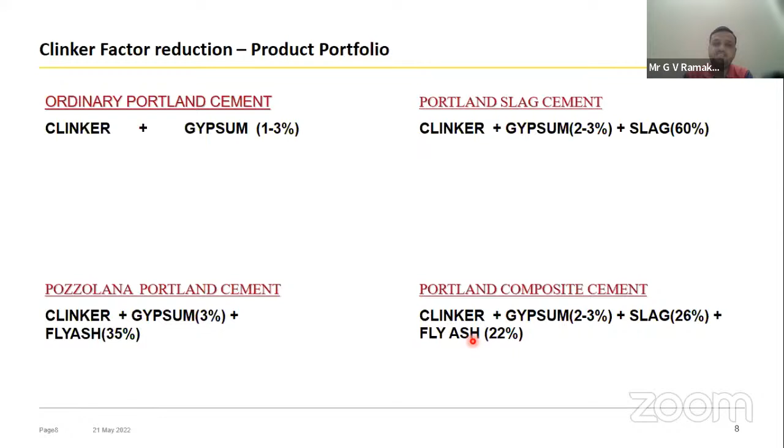Then the next is reduction of fossil fuels, like we do co-processing. Co-processing is usage of alternative fuels or green fuels in parallel to the fossil fuels which we use, like coal or petcoke, in our cement manufacturing.

The main advantage of co-processing is this: whatever ash is generated by burning alternative fuels, RDF, biomass, plastics - all materials which have been rejected or cannot be recycled or reused further - whatever ash is generated by burning becomes part of the clinker, and no waste is generated by burning this waste. This is the main advantage. Being an energy intensive industry also gives us an opportunity: based on 1400 degrees centigrade, we can burn each and every type of waste available in the market.

So this is the hierarchy: first step is to reduce. As was said earlier, a single person is a stakeholder, so each and every person has to step in and work to reduce CO2. First is to reduce - we have to reduce the potential waste.

Then reuse, wherever it is possible to reuse waste material - like we had seen earlier, furniture has been made, or concrete debris can be reused. The third step is recycle - whatever has been reused after that, whatever is saved, it can be recycled into other products, or if not possible, then only we go for co-processing.

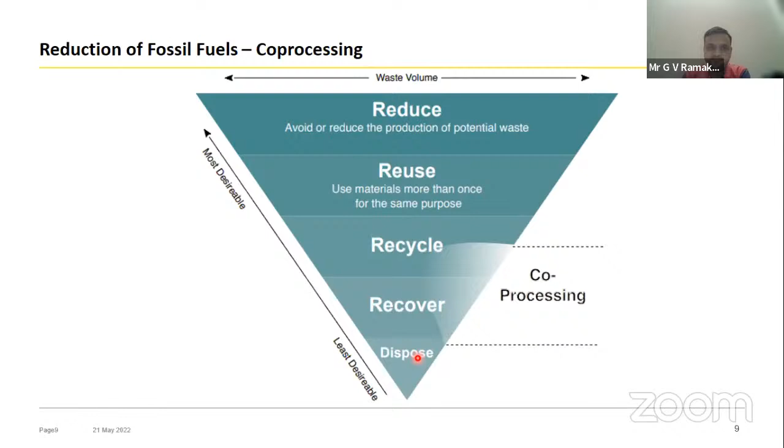In order to reuse waste, we have to implement various technologies. Different types of waste come in, like liquid, sludge, and solids, so we have to go through different steps. We use these in our cement kilns to run the process stable and produce good quality clinker, so that quality cement can be prepared. We can use higher additives, so these are all interlinked.

For size reduction, there are shredders, crushing, and grinding. Then we have separation, where oversized separation is done, metal separation, and air separation can be done. Mixing, impregnation, or solid mixing, where we mix liquid, sludge, and solid to make it flowable, homogenization, and thermal preparation, meaning drying it. So what we get is the alternative fuel raw material.

This waste comes in various sizes. It comes in drums, it comes in jumbo bags. So when it passes through all of this size reduction and separation, it becomes the alternative fuel for our cement industry.

As said earlier, there's the preheater, pre-calciner, and main burner. The pre-calciner and main burner are the two places. According to the firing location, we have to prepare the material size. If drums are there which are around 1 meter height, it has to be reduced to 50 to 60 mm of size.

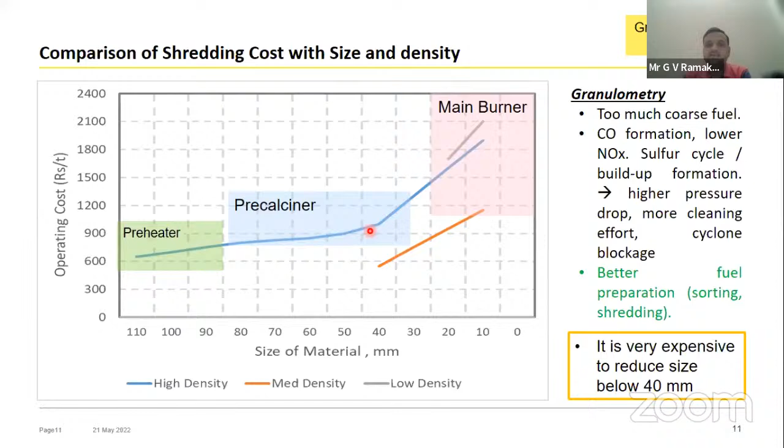This makes it combustible in our cement kilns, and also keeps the cement process stable. If we look at the size of material, the smaller the size we make it, the operating cost of that particular material will increase. So it's important to make optimum usage of the pre-calciner and the size of the material to gain the benefit from using alternative fuels.

These are the alternative facilities we have installed. The material which comes in is handled by heavy equipment and goes to the shredders, all of which are imported. After shredding, material separation takes place. The metals are separated, then screening takes place, where smaller size material is screened and oversized materials are recycled back to the shredders.

What we ultimately get is material of less than 75 mm size, which is fed through feeders to our pre-calciners through double flaps of feeding to the calciners. In Dalmia Cements, we have installed around 9 shredders and screens, with 500 tons per day of capacity.

Our present consumption is around 3,000 to 4,000 tons of plastic, RDF, and hazardous materials per day in our cement kilns at around 8 locations. In liquid feeding systems, we have installed 3 numbers, consuming around 100 KL, 100 tons per day of capacity. This is the quantum of waste we consume in our cement industry, which helps the community by reducing the dump area where huge stocks of RDF or biomined RDF were stored.

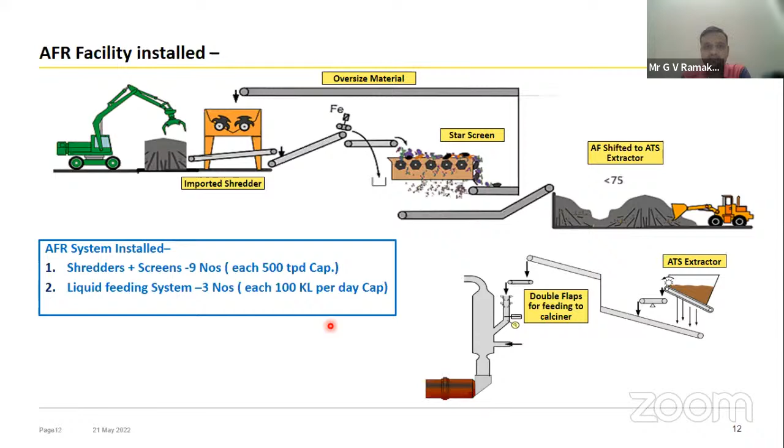There are other challenges that come with RDF or MSW, including household waste. It's high moisture and ash. There's moisture in this process and also ash coming in, so installation of an RDF dryer for reduction of moisture and exploring systems for separating the ash is needed. The other major component is chlorine, which is present in plastic and RDF. This also limits our process from consuming higher volumes without further investment in our cement manufacturing.

If higher chlorine goes into the cement, more than 0.1% in cement, there will be corrosion issues in the long run for the beams or pillars prepared. So to minimize the impact on clinker process, we have to install chloride management systems. Chlorine bypass systems have been installed so we can take a higher amount of chlorine into our system, thereby reducing the CO2 footprint.

Consistent feeding and granulometry - we already saw how size is very important in order to feed into our cement kilns and also to have a stable cement process.

How we do our business is business to business, B2B. We have tie-ups with plastic mills, FMCG companies, aluminum industries, Vedanta, Hindalco, and many more industries. We get waste directly from these industries, do the pre-processing with the help of shredders and systems available with us, and then feed it to our cement kilns.

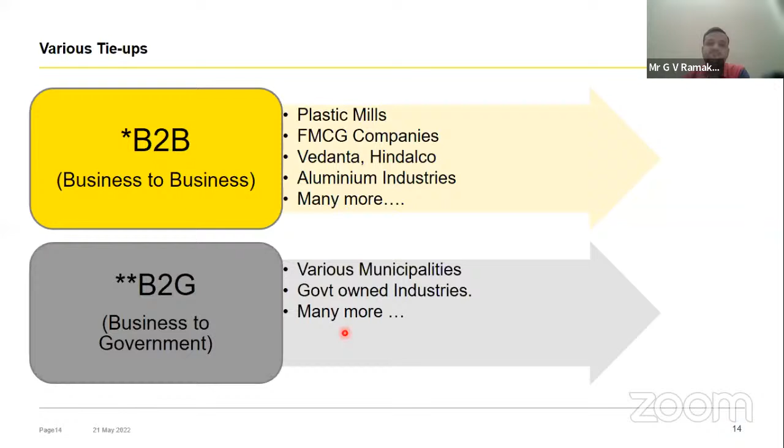If we go for green power production, by 2023 we will have a total of 72 megawatts of WHRS capacity, of which 40.8 megawatts will already be added. Similarly, for solar capacity, by next year it would be 100 to 101 megawatts of power being generated.

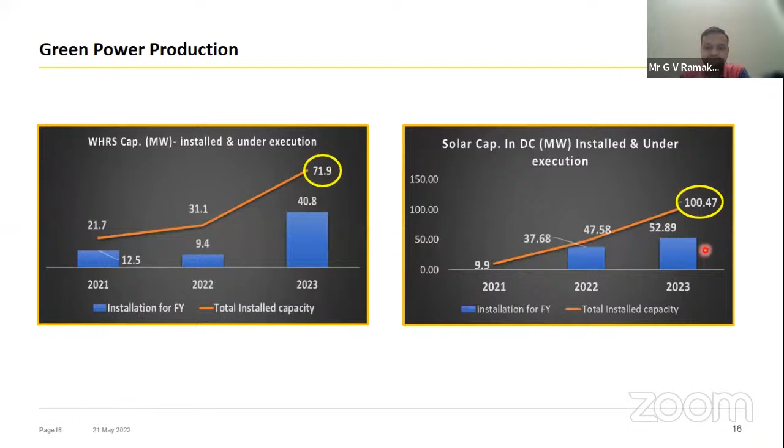The other is carbon capture technology. Our view is that policies need to be supported like in the US. Government has to step in to support the industry with policies useful for CCS technology. The land and infrastructure rights needed are difficult for the private sector, so CCS is only possible with government infrastructure support in a big way, and EVs need to replace IC engines.

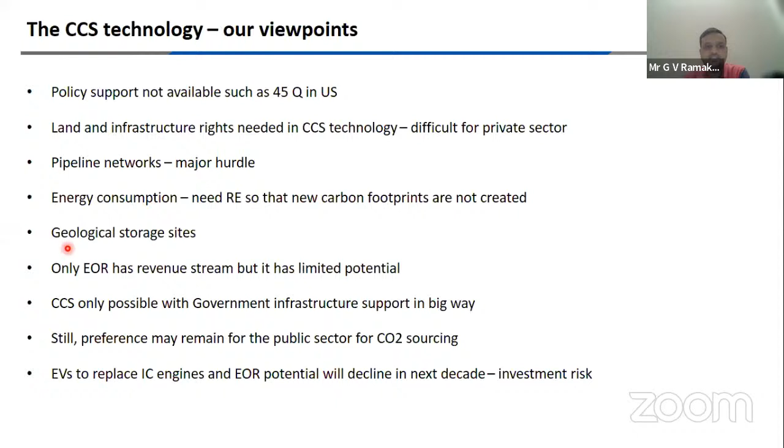CCU technology like CO2 recycling pathways could deliver deep emissions reductions. Geological storage sites have to be mapped so we can store the captured CO2.

This drives demand in core sectors like renewable energy and green hydrogen. The challenge is the high cost and acceptability. Capturing CO2 is costly, and the economic balance also has to be seen by the cement industry for getting into sustainable waste management.

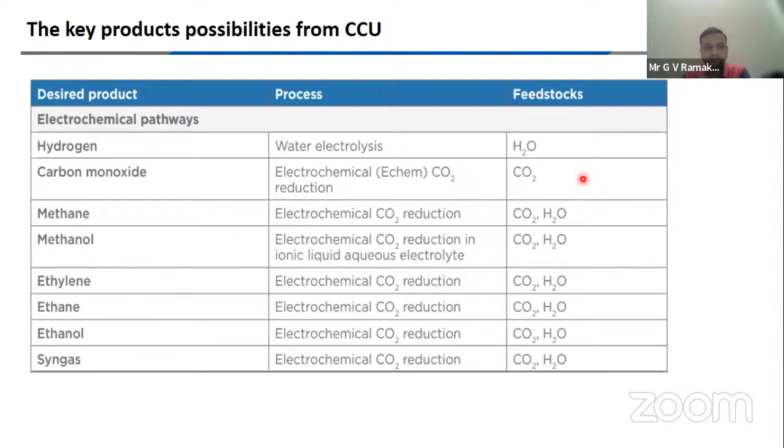These are the key product possibilities or feedstocks - hydrogen, process, water electrolysis, feedstocks. There are many desired products, processes, and feedstocks that come out of this.

This is the main message we would like to give: giving back to the motherland, to the environment, needs patience. So never give up on sustainable solutions to reduce the carbon footprint. Thank you.

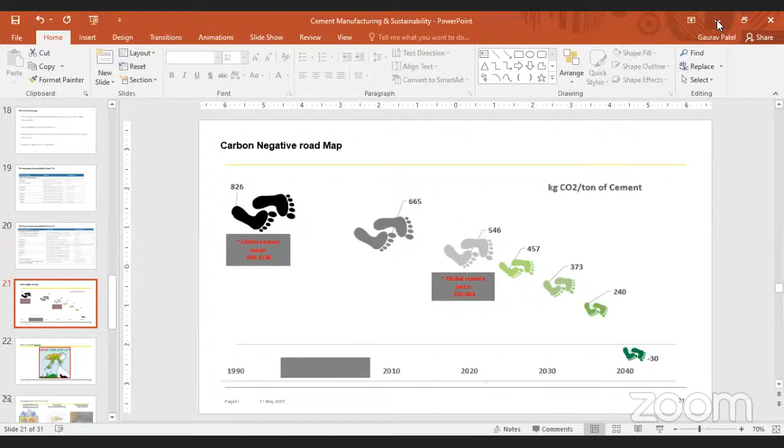Shah Sahab, can you hear me? Yes, yes, sir, kindly extend the vote of thanks. Oh, actually in between I could not connect. Okay, so let's do the question answer session.